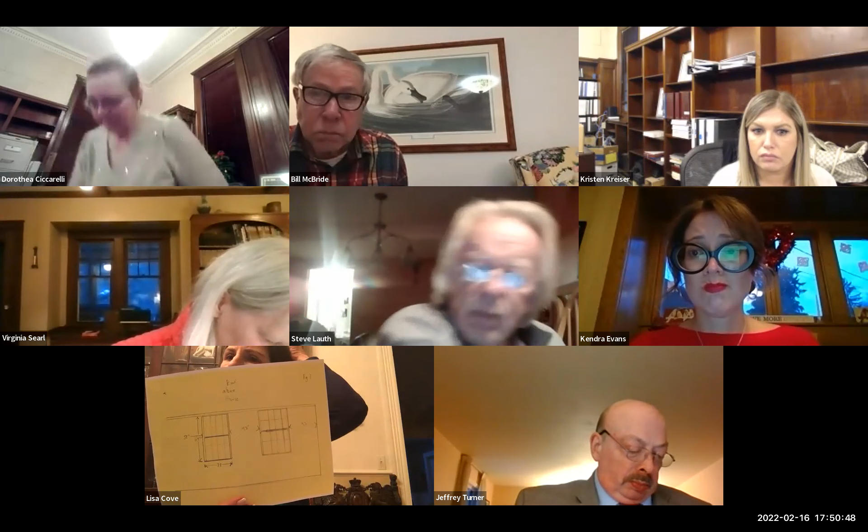Is it this? Are you talking about this right here? That should be, is that marked like page 1, 2A, 2B, page 3? Yeah, page 2B. Yes, page 2, 2A, 2B, and 3. There should be a 1, 2A, 2B, and 3. I see 2A, 2B, okay, hold on. Wait, let's see, here's 1. Okay, so is this 1 with the door? No, no, I don't have it.

I have 2A, 2B. Ginny, do you have these? Yes, I do. We should have an existing drawing and a proposed drawing. Yes, that shows the full elevation, the whole thing complete on one sheet of paper. It was too large, I mean, then you use a smaller scale.

Hey, this is Jake Deagle. So again, we submitted our application in advance. We received no comments from the board. So can I request that we move on to a decision here, and you guys can discuss this offline?

Well, we can't make a decision until we understand the proposed drawing. So we're trying to do that for you. At the last meeting, it was requested that scale elevation drawings be provided. That was the feedback you got from our first meeting on this project. And that's what I contacted the contractor about, and he provided a drawing. If he would have put that drawing on one sheet of paper, you wouldn't be able to see any of it because it's too wide to do in one sheet of paper. That's why he did it in 3 sheets.

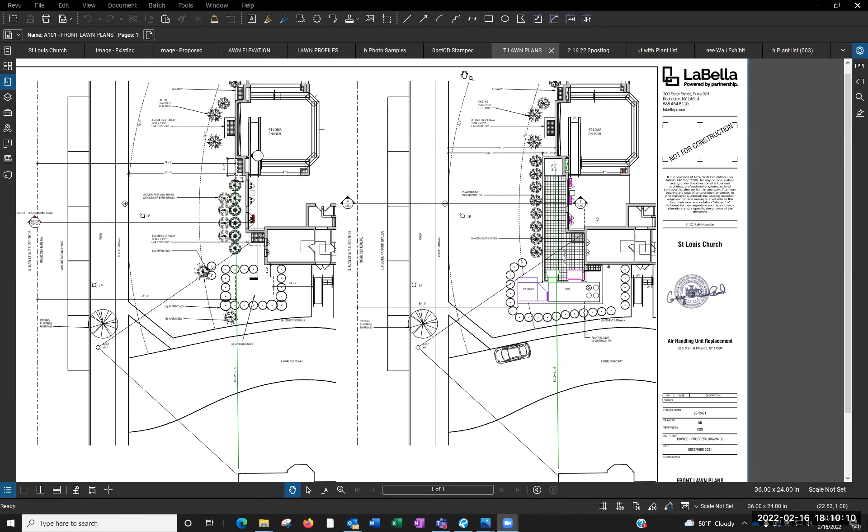And then as far as the wall, you're using the wall to hide the connections, right? Correct. Casey, can you show us a cross section? And those are underground? One will be underground, but one will run above ground. The reason we spent a lot of time on that with planning and zoning is historically we have had significant water table problems in the church basement.

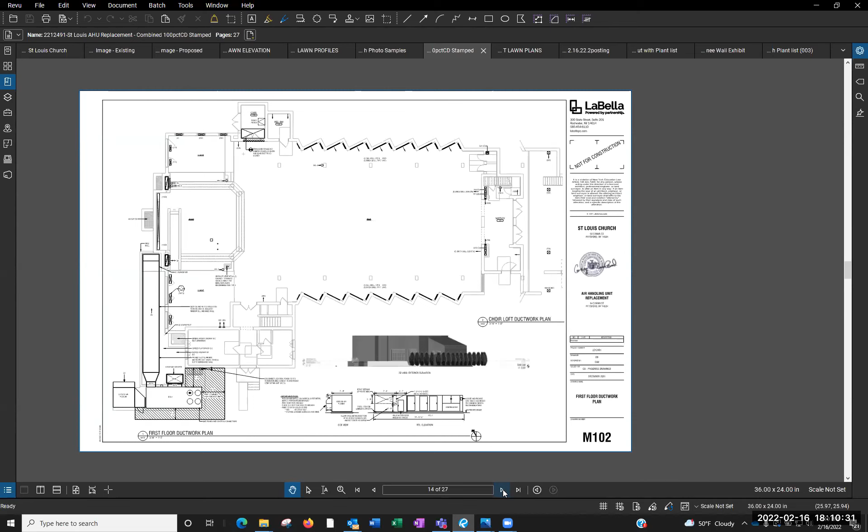We really don't want to go deeper in the ground and displace more water, and also run the risk of having water infiltrate the ducts. So if you look at this floor plan, you can go back to that, Casey.

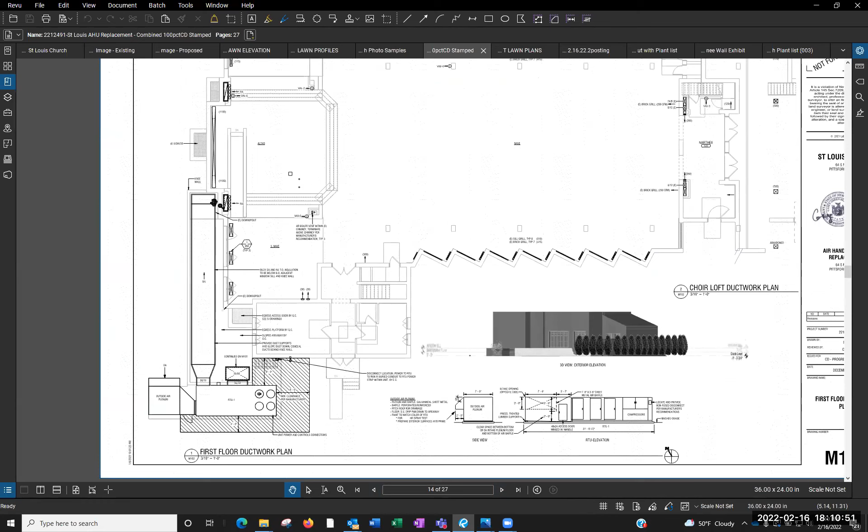So the target area that we have to get to is up at the top left of the screen now, this little box—that's the altar area, and immediately under that is the mechanical room. So that's where all the ductwork comes back to, and that's obviously where we need to connect.

Then at the bottom left of the screen, the box with the 4 little circles, that would be the new unit in the same place as the present condenser. This vertical box is the ductwork running from it. To enter the church, there's an existing opening on the front of the church where currently the outside air is sucked into the heating system.

And that opening in the foundation is large enough for the two trunks, the two pieces of duct, to fit through and then connect to the boilers to provide heat.

Okay, so what you're doing for us today—because I know that information went through planning and zoning, so they got the mechanics of all of this—our charge as a preservation board is to make sure that the unit and any ductwork is hidden appropriately for the architecture of the building.

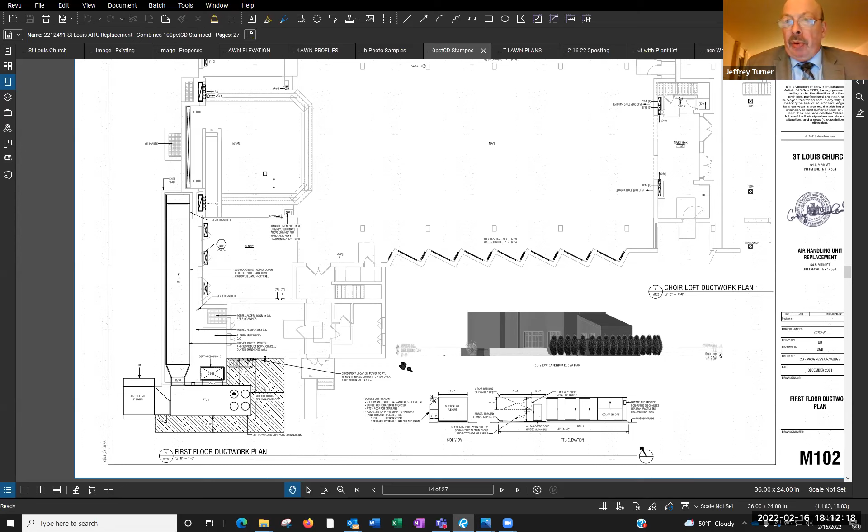Correct. So is the wall, is that correct? So you're reviewing, Lisa, the wall. Lisa, the charge of the HPB is to review the knee wall for appropriateness. Okay, so it's just the knee wall, not any landscaping tonight. Correct, just the knee wall.

Okay, do we have any materials list on the knee wall? Do we have a photo of what the knee wall is going to look like? Okay, I'm going to go first to a painting. Casey, can you bring up the painting? Yep. May I make a comment here?

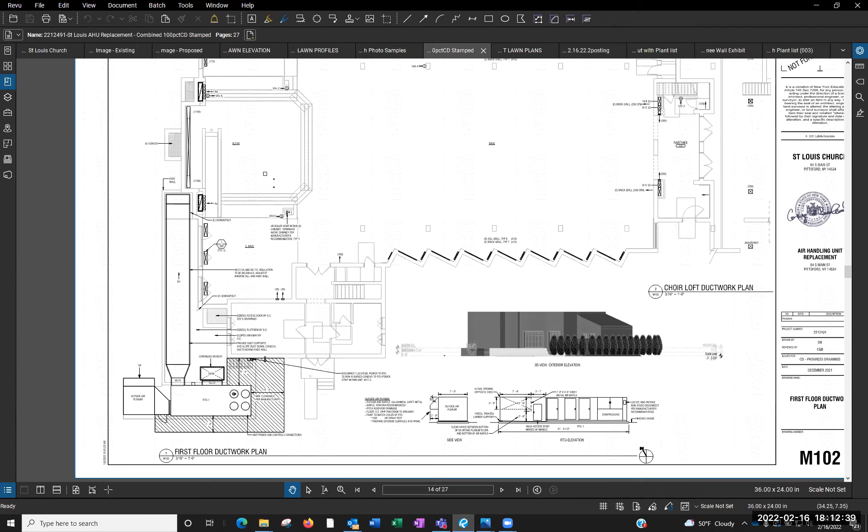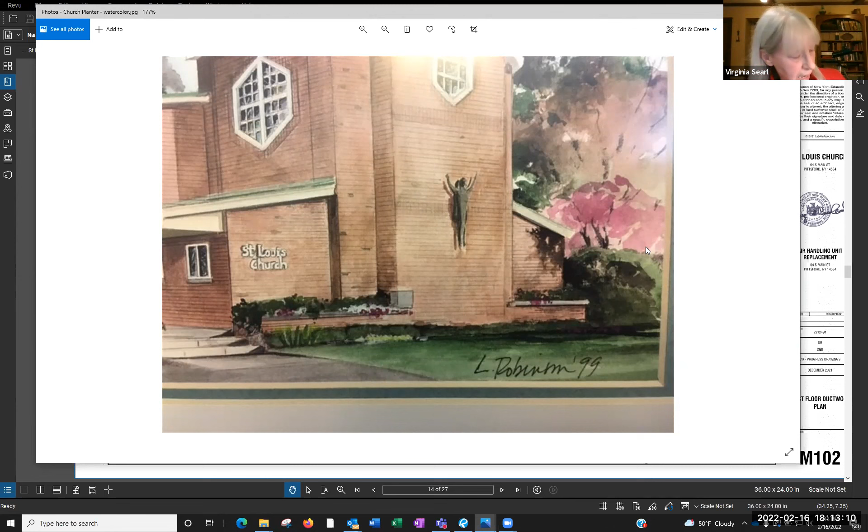These are very nice mechanical drawings. The HPB does not care about the mechanical system, as Jeff has pointed out. Our job is to look at the knee wall, and on the page that was just put up, M102, there's a tiny image that's very dark, and that's the only elevation drawing that was provided to us. In this instance, again, we don't care about all the mechanical drawings.

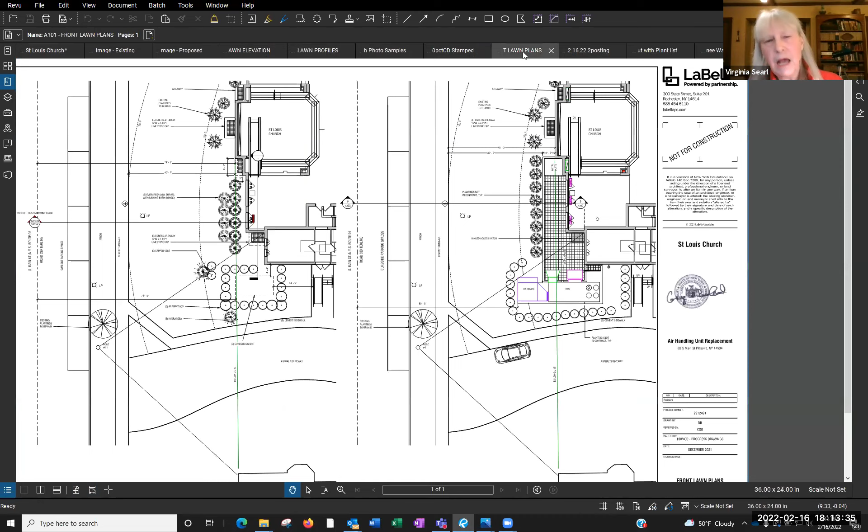That's not our purview. It has no impact on our decision, the mechanical system. We need to see a clear elevation drawing that shows what is proposed. And we don't have that.

I have to agree with Ginny on this. It's the one thing that we had asked for during the information session, to make sure that we could see that knee wall without landscaping. I have a very difficult time voting with what was in the packet ahead of the meeting.

Well, what information thing? I'm sorry, Claire, who's asking a question? Yep, Sally Schrecker. Okay, yeah, Sally. I realized that not all the materials that we prepared got put into your packet, but you did make a reference to some kind of an informational thing. Yeah, so you guys came—something in the—I'm sorry.

We heard this project as information only, and we had talked primarily about the wall. That was our biggest concern, and that we would need elevation drawings, a materials list, and a visual of what that wall is going to look like.

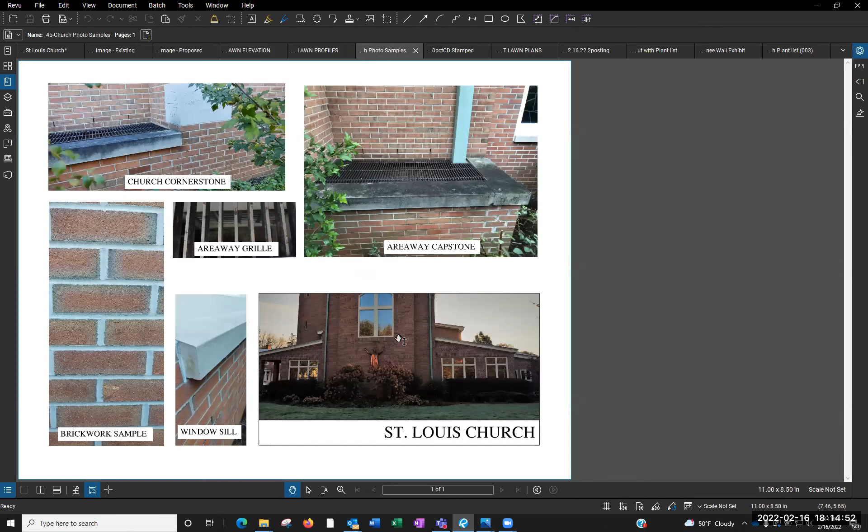That's our concern. Okay, well, I don't recall there being an informational meeting. Yeah, I don't either. If there was an informational meeting, I must not have been in attendance. No, this is the first time we've been before HPB. Well, Kendra, do you remember talking about this? I do, yeah, I knew this was coming. Why am I surprised? And Ginny was there. Yeah, we were all there.

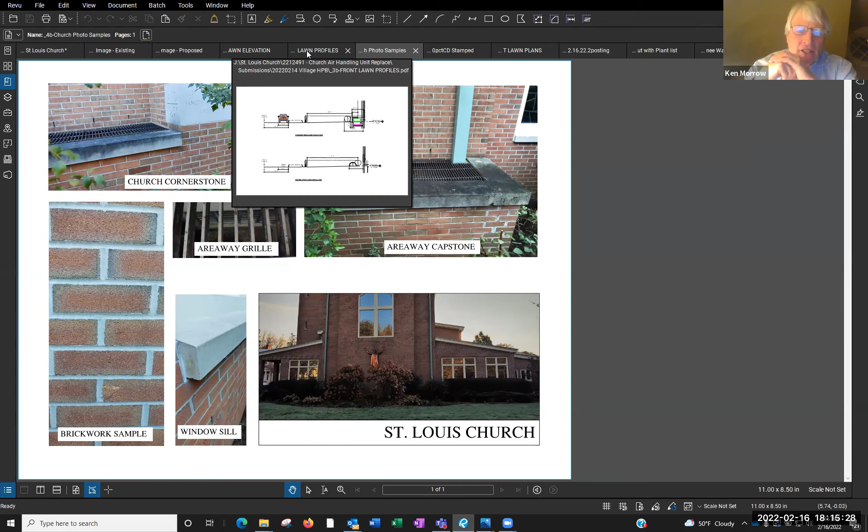Excuse me, is it possible that Steve just gave us a heads up on what was going on? I remember we got a heads up that we should be aware that there was going to be a discussion about it.

Okay, well, it doesn't really matter. What matters is that we need an elevation drawing of this wall. We need a materials list. We need to get a visual of where this is going to be put and placed on the property. So we can't go any further tonight to vote on anything because we don't have anything to vote on.

So if we could table this—Sally, if you can go back to the landscape architect or whoever's going to do this wall for you, and have them do an elevation drawing and a materials list, and give us an idea of exactly what this is going to look like and where it's going to be placed on the property, that's what we would vote on. Does that sound okay for you?

Oh yes, I can understand that. Okay, so as I understand this, there was a wall out there historically. Yes, I'd like to show you that picture. Do you have pictures of that?

I would urge that we table it until we have the new dimensions. I think, okay, but when that comes back, you come back in the packet—bring us the drawing of what was originally there, so we can get a visual of what that was, and then what you're proposing it to be.

I'm sure someone in the architectural department at LaBella is familiar with the kind of drawings that a preservation board wants to see. They do a lot of preservation work.

Okay, so is that okay to table this? We'll have you guys get that information to us, and hopefully we'll get you on the agenda for next month. Can I just interject? So are you seeing the screen right now? Yes.

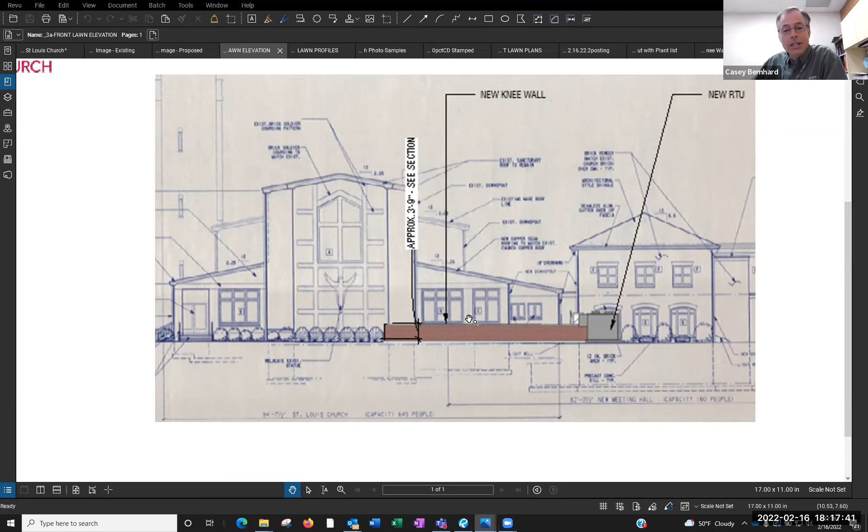I realize this is a drawing from the 2000 renovation project where they did an elevation view. We've superimposed the knee wall and the unit without any landscaping. We have a lot of stuff, I don't think everything got into the application that you have. So is this what you're asking for? We also have renderings - this existing view, and then a proposed view with plantings. I have another one, a rendering with no plantings, if you give me a second I can pull it up.

If you go back to that image that's a blueprint with the wall superimposed, what is that big gray box on the right-hand side with a leader going to it?

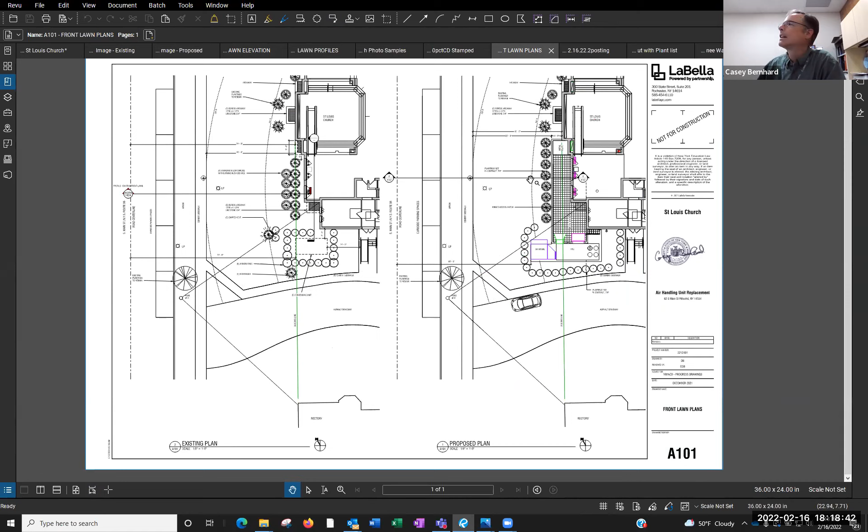This is a drawing that I find is maybe the simplest thing to show you existing and new. The left side says existing plan view - this is what's existing now. This is what is proposed. Just to zoom in a little bit here, this is the existing condensing unit - that's the same thing that most houses with cooling have outside that gives you cooling.

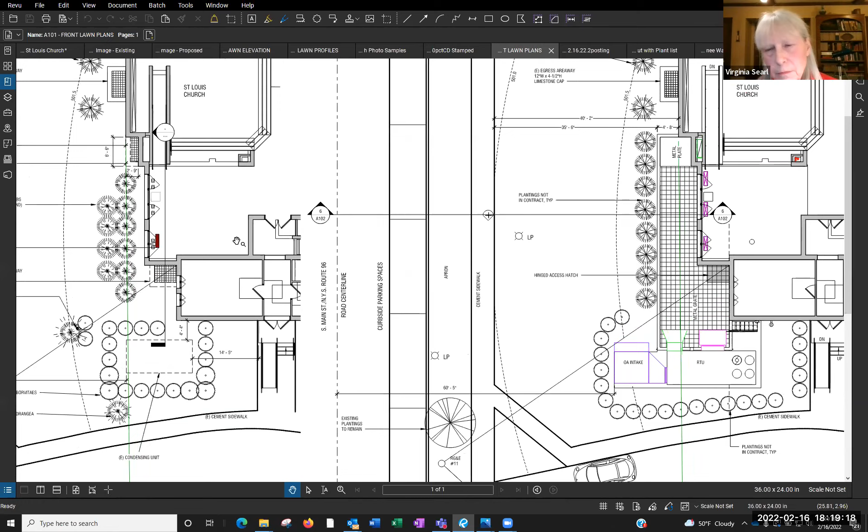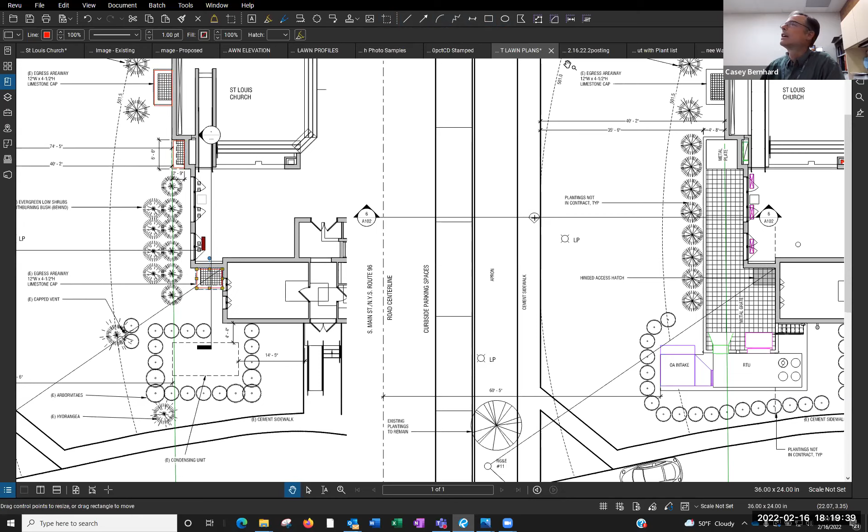The knee wall is not shown on that drawing, is it? On the existing drawing, there is no knee wall - there are areaways. This right here is an areaway that is very similar to what the knee wall will be. That's an areaway, and then this is an areaway. That is all. Sally, I can show you this stuff.

This picture here shows those existing areaways. Okay, so what - there is no knee wall there now? They're just the areaways. Correct. That's what's left from the original.

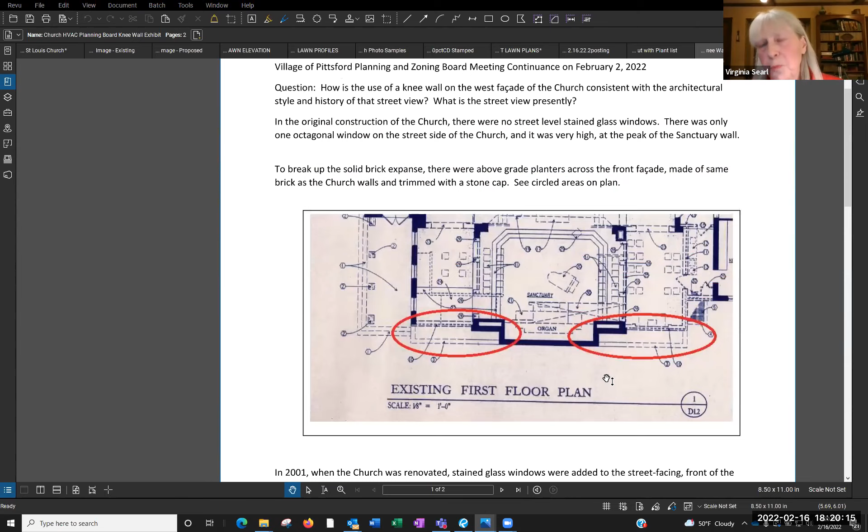Casey, if you could scroll up to the top. Can I go back to the question that I asked with the blueprint that you had? What's the big gray box on the right that's showing in front of the house next door? What is that? That's not the house next door - that is the parish meeting hall, which is connected to the church, and it is the new rooftop unit. Up at the very top right it says new RTU.

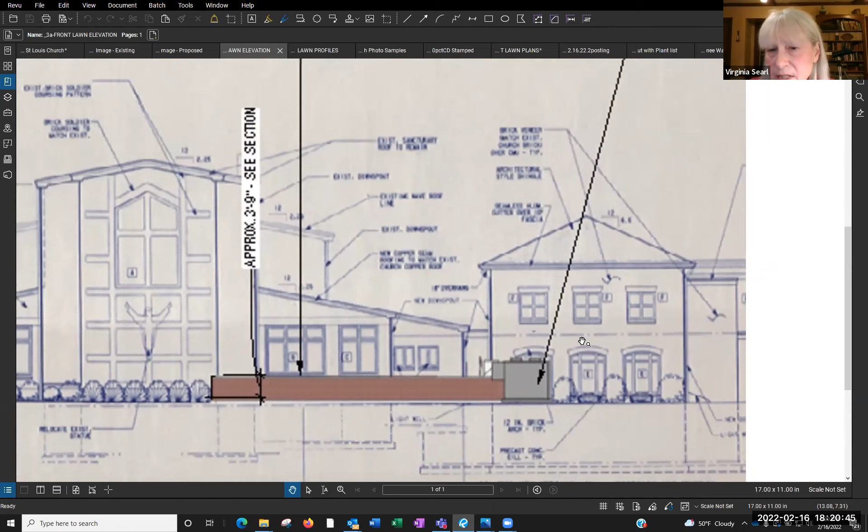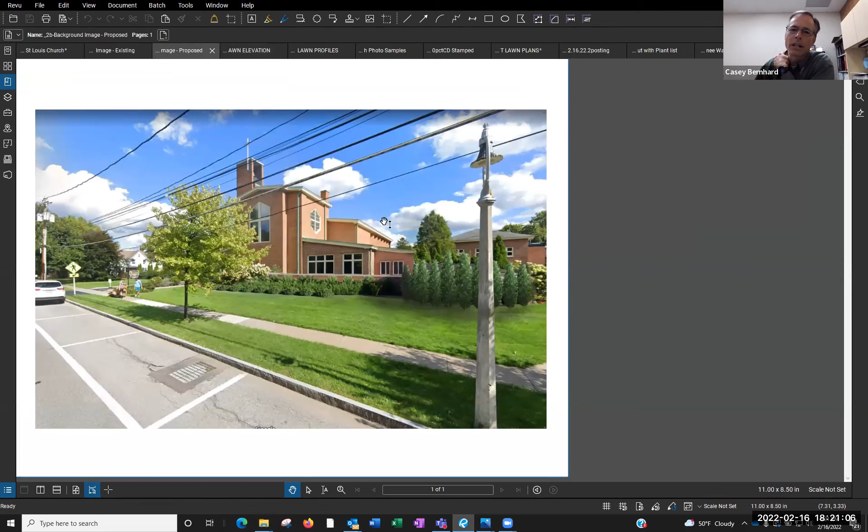I'm sorry, I can't see that. Okay, but that's not on the rooftop - that's on the ground, and it's completely obscuring one of the 3 windows on the first floor of that building. But the existing unit does the same thing. Yeah, this is a rendering of proposed. So here's the existing view, and this is the proposed rendering.

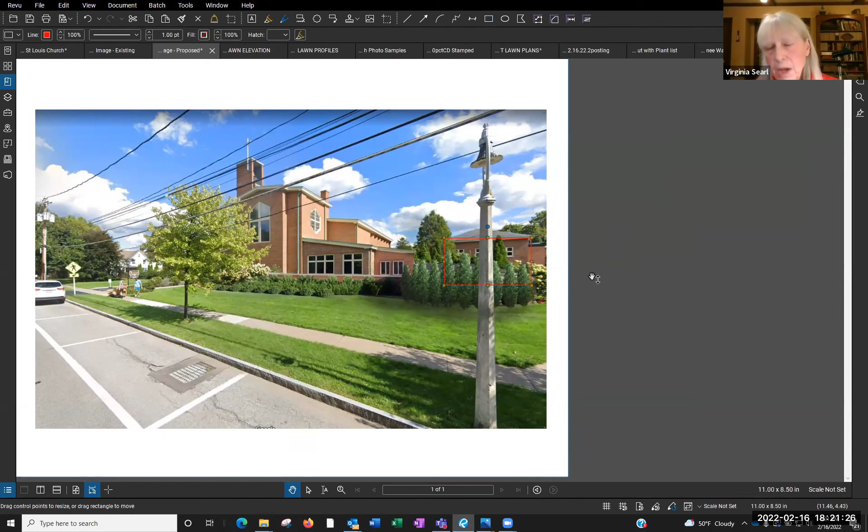Okay, and point out to me where the parish meeting hall is on this rendering. Okay, is that right Sally? In the background, yes, the one with the shingled gabled roof. Okay, and also this picture is a side picture - I need to see it from the front, because right now we're looking at it from the side.

So if you were to stand, it's from Main Street - that's the front of the building. No, I know the front, at an angle - it's not a full front elevation. Yeah, right, you're at an angle here. If you were to - this is a photograph. Right, this is a photograph.

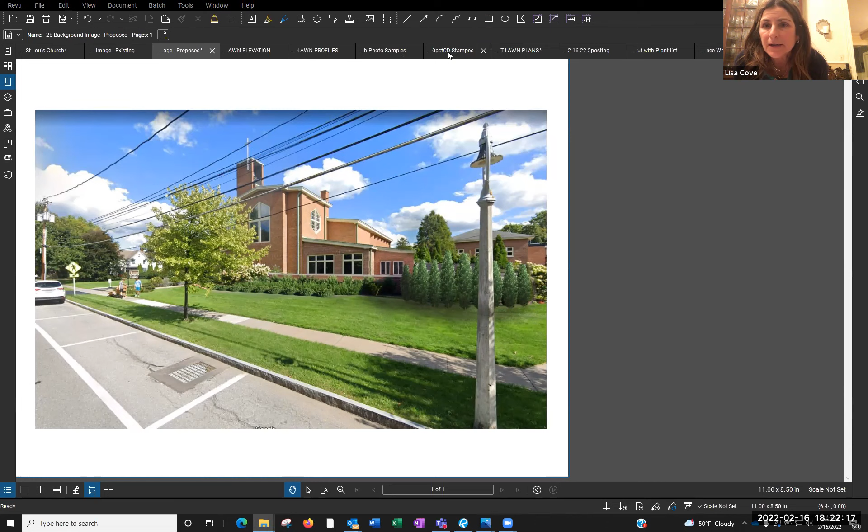So what we need is we don't have the dimension of the wall, we don't have the materials of the wall, we don't have the drawing of the wall. I think we've got a lot of fluff in here of mechanics, and we don't need that. We need specific visuals - we don't want to look at it from the sky, we want to look at it from the ground to the building. So what we're saying is we don't have enough information. We can talk with Steve and find out exactly what we need, but this one thing is not going to do it.

We need to make a motion to table at this point. So we're going to move forward - it's not complete for tonight. So do I have to make a motion to do this, Jeff?

Jeff Turner, are you there? I'm here, yes. If you're going to table it, can you give the applicant specific instructions about what this board is going to need to see to review their application?

It sounds like at the very least you need measured drawings of what is there right now without the shrubbery, measured drawings of their plan, a materials list, a photo of the current state head on, and another photo drawing in the wall exactly where it's going to be.

Well, that's good, but we also need the architectural drawings because that's the requirement of the application - drawings of what is there, architectural drawings of what they want to put there, and a photo of what it looks like from the street head on, with the knee wall drawn in to scale.

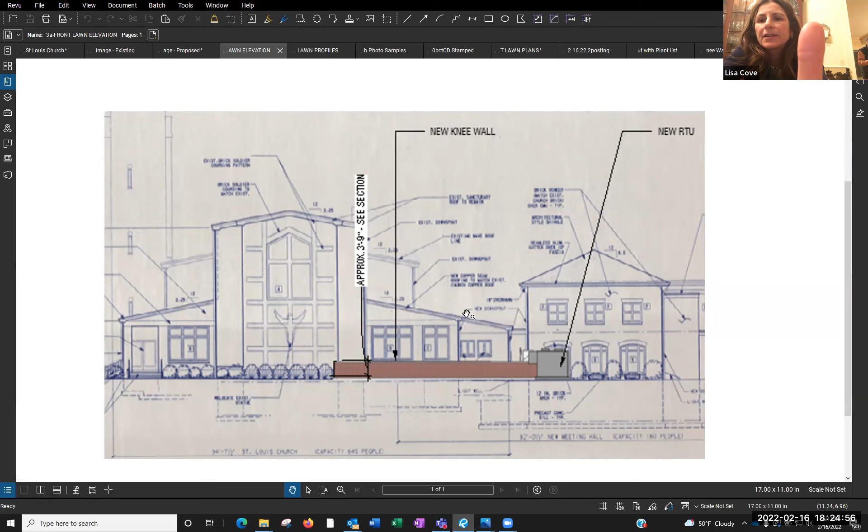Okay, Sally, okay with that? Yes. Okay, thank you guys very much, and we'll look forward to hearing you. Well, thank you for taking the first look.

Okay, Sally, we're going to move on to signage at 18 to 20 South Main Street. Do we have our applicant here? Jessica, give me a moment. If the applicant for 1820 South Main Street is here, please raise your hand. I don't see you. I'm not seeing him at this time. I suggest the board moves on and we'll come back to him if they show up.

We are going to 52 Heatherhurst Drive for replacement windows. Okay, the applicant for Renewal by Andersen - I guess Sue is going to be the person speaking on behalf of the homeowner. Is that correct? I'm still checking. There's Kenneth Connor. Okay.

And Mr. Connor, you should be able to speak. Is that Ken? Hello. Hi, Ken. Hi. Good to see you again. You too, without a mask even. I know, nice, in the privacy of your own home.

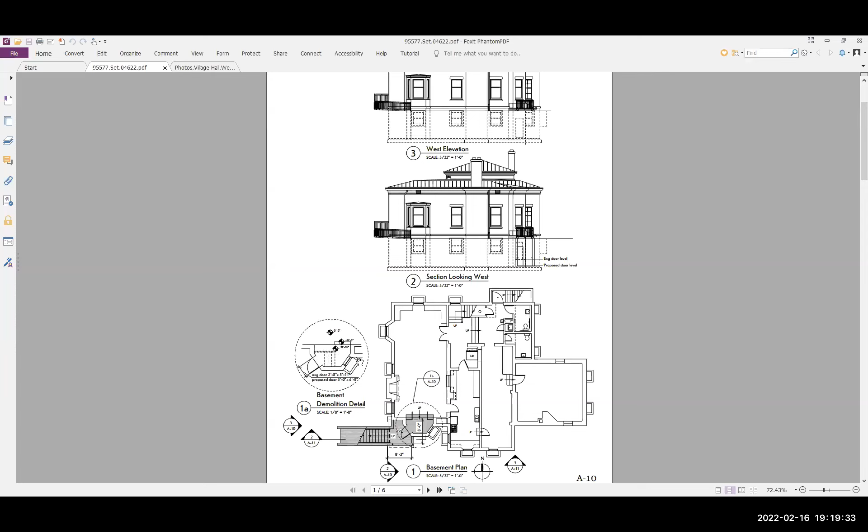So the scope of work includes replacing the existing concrete steps to the basement with a wider, more gently sloped stairs. Here's a plan showing it.

This is the basement plan. You would come off the parking lot and have a shared concrete walk, either to go to the front door or to the new basement entry. Then it takes you down to a larger landing at the bottom of the stairs.

And then we have a roof canopy that's designed as a hip roof to cover the landing to reduce the buildup of snow and ice. It's proposed to have a standing seam zinc or tin zinc alloy coated copper roof compatible with the Village Hall, which has hipped roofs with the archaic field formed standing seam, as Virginia talked about in an earlier application.

A significant part of this work is to lower the landing level and increase the size of the existing masonry opening at the door, so that a code compliant door and a landing on each side can be provided.

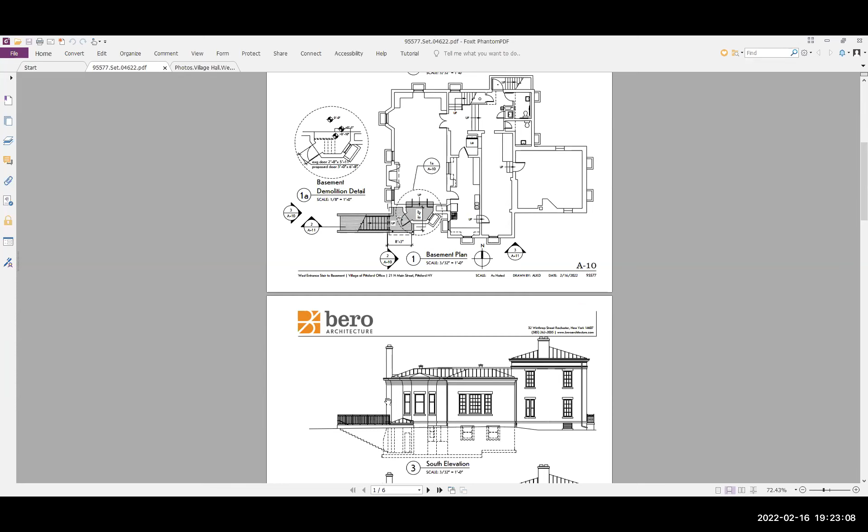Lastly, the metal guards will match the design of the north entrance walk-in ramp, and we're studying including heated sidewalks that will further enhance the safety for occupants getting in and out of the Legion Room. That concludes what I prepared for you.

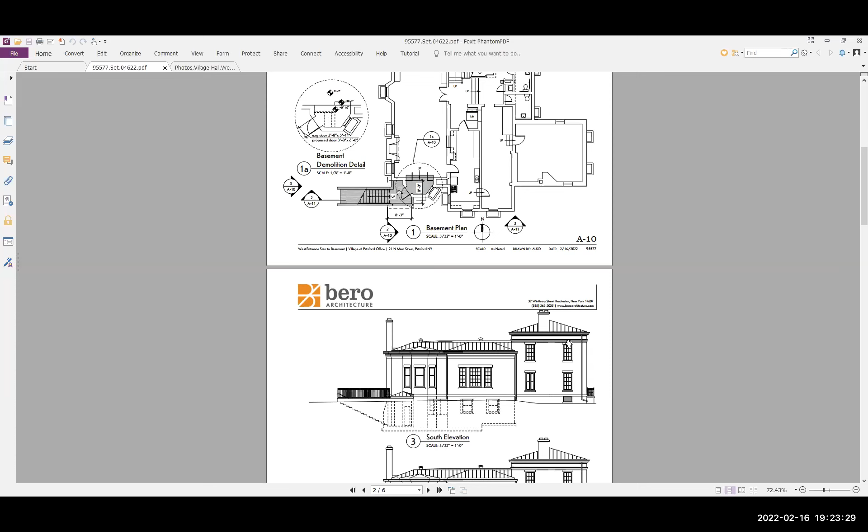I have a question, this is Lisa Cove. There is a talk of some kind of canopy. Yes, there's the canopy, can you see that? No. It's in red here.

So it's a small canopy roof that would protect the door below, because you would go down the stairs and the canopy covers that bottom landing. The canopy is shown red in our drawing because we couldn't change it to gray, but really it would match the lead coated copper roof you have on your Village Hall. And it wouldn't cover any of that window at all. Correct.

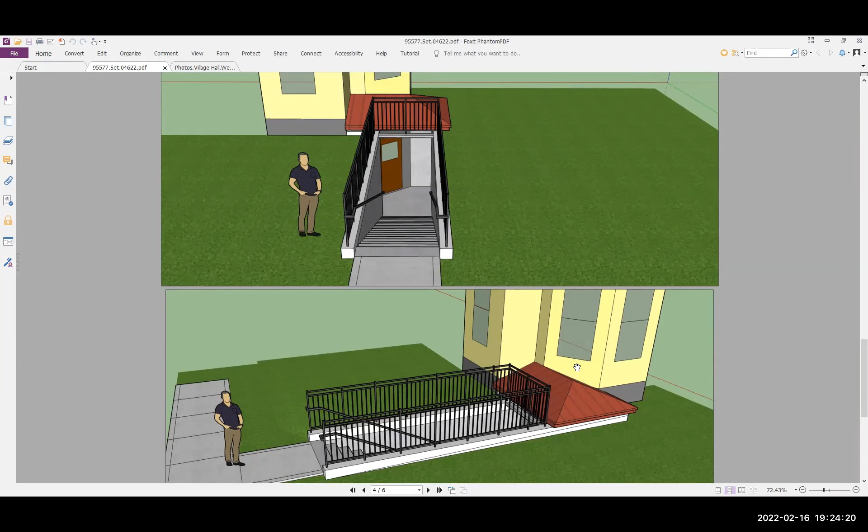These are just some SketchUp renderings, preliminary of what we're proposing.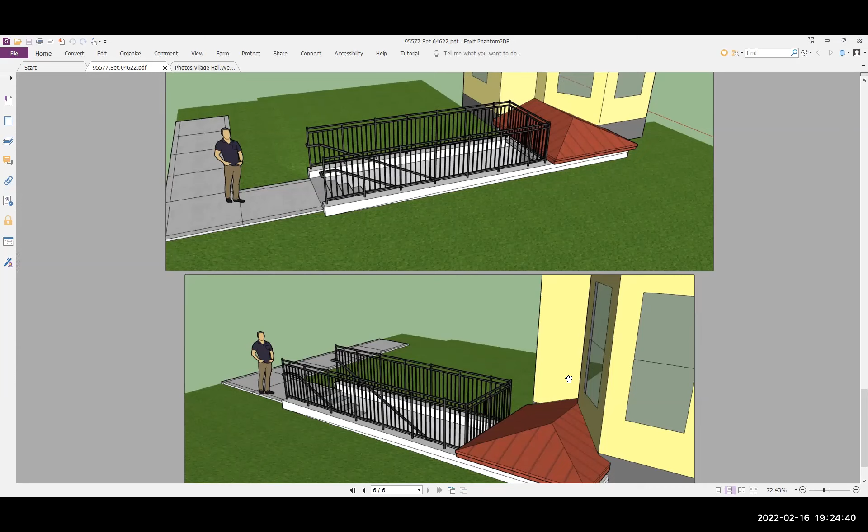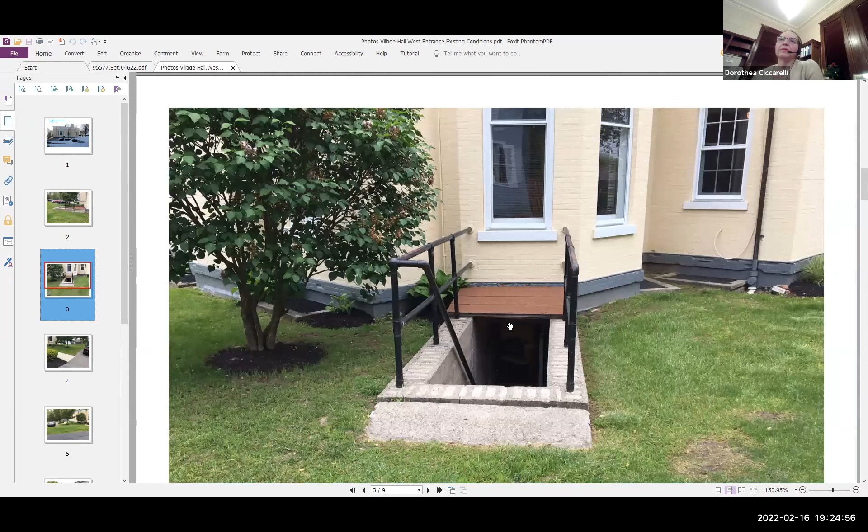Does the canopy have to sit up there? Can't you have it cover over the door down below instead of sticking up out of the ground? Well, the door head is... because what's there now to cover the door? Here's an example right here, switching over to the photos. Yeah, cardboard - it's like a piece of wood with some shingles on it. I don't think it's anything. So the purpose is to keep the weather off of the entrance of the door, correct? Correct, it keeps ice and snow from building up at the bottom of the ramp to keep it as safe as possible. So I'm just wondering - is there another option than having that kind of protruding out of the ground?

Okay, so here's an elevation right here. You can see that we have retaining walls surrounding the steps that go down, and then we have the roof on top of those retaining walls. I guess to limit the amount of earthwork, because we'd have to provide retaining walls if we wanted to recess a roof area, and more retaining walls to protect the roof covering. So it's possible, and we will look into it.

Yes, Virginia, you got your hand raised. You're muted. You're muted.

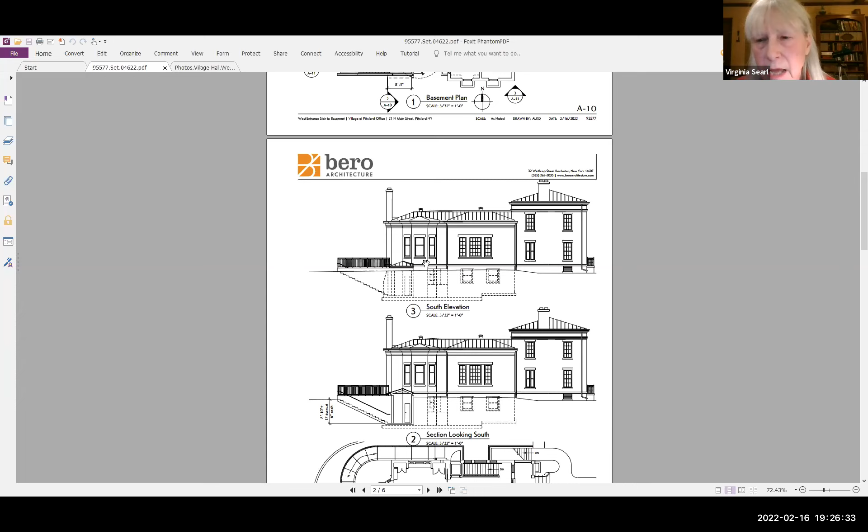I'm pretty sure the roof on the Village Hall now is bright copper. It's patinaed now, but I think it's bright copper, not lead coated. That was my job. Well, then you know. I know George Easton did the work, but yeah.

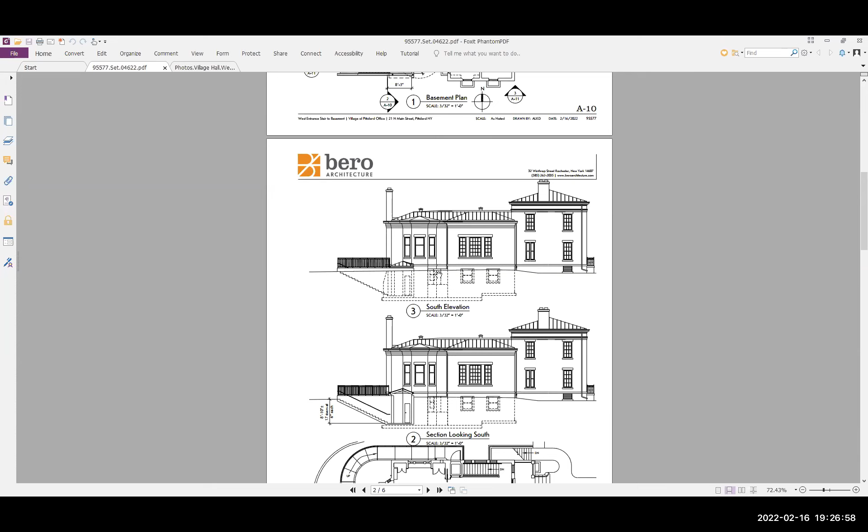The elevation. Oh, you're muted again. You're muted again, Virginia, I'm sorry. Never mind, she said never mind. I did read that, yes.

If I could circle back to that covering, it looks on the elevation drawing as if it sits lower than the railing, even if it's not accurate. So it's not -- yep, it does. This is a model of it. Do you see the model with the red roof?

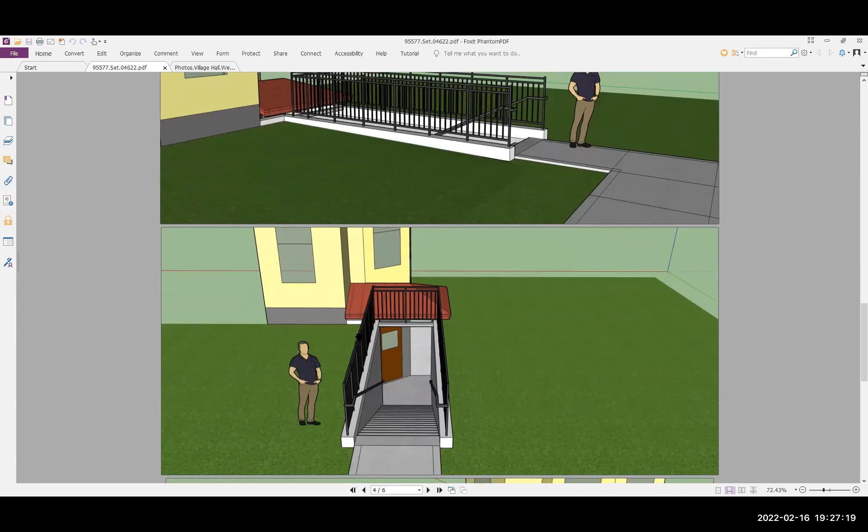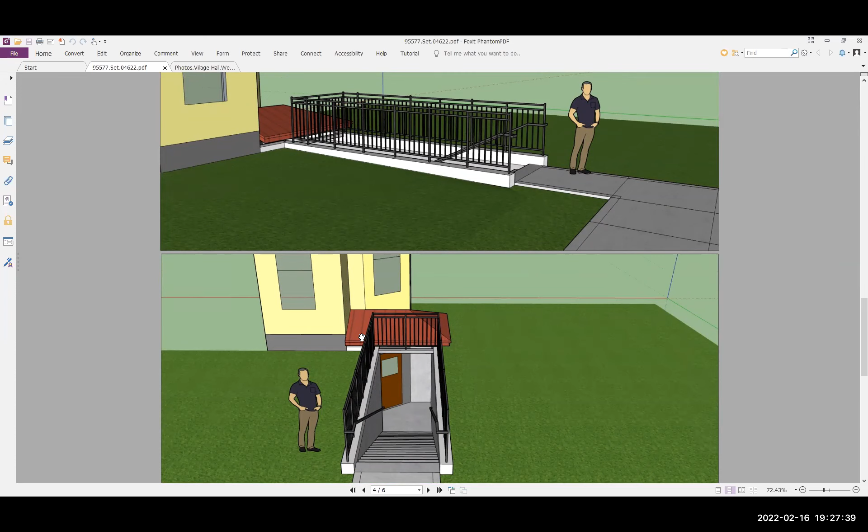As we were talking about it, it's obviously a great improvement over what's currently there, especially if it matches the roofing above. But just as some of the concerns, I think rather than adding a retaining wall -- this is still lower in elevation than the windows and the railing, and it makes sense to me. And it's below the window. That was a good question, whoever noted that.

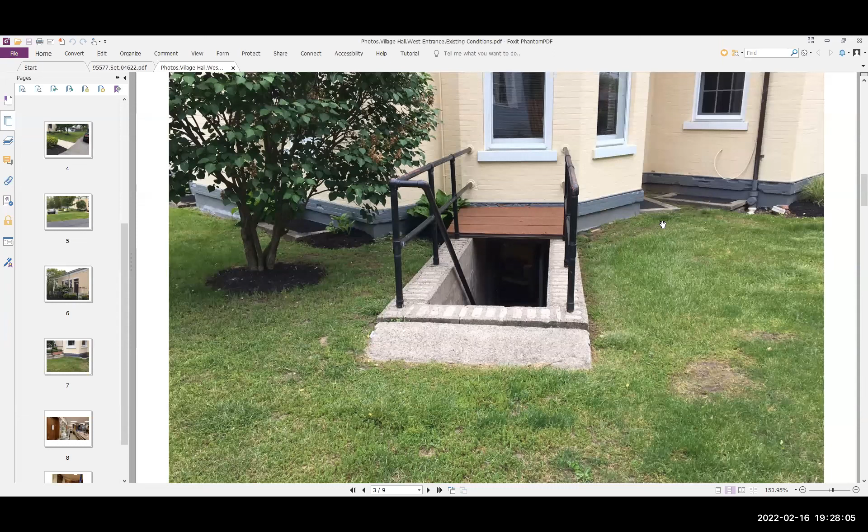I have a question. What are the windows shown in the drawings of the existing building that are below the Earth's surface? There must be areaways or window wells. Here you can see in the photo. Yes, those are from the basement. Some are in our furnace room. Some are in the hallway. Window wells, yeah. Oh, here they're shown in plan. They're window wells. Okay.

So again, as Dorothea said, we're engaged again by the village, and so we're basically looking for a concept. You're headed in the okay direction. We will be coming back with more detailed plans and a materials list, but we wanted to make sure we were on the right path and that you approved and thought it was appropriate and compatible. We will also be reviewing this with the SHPO through the contract document phase.

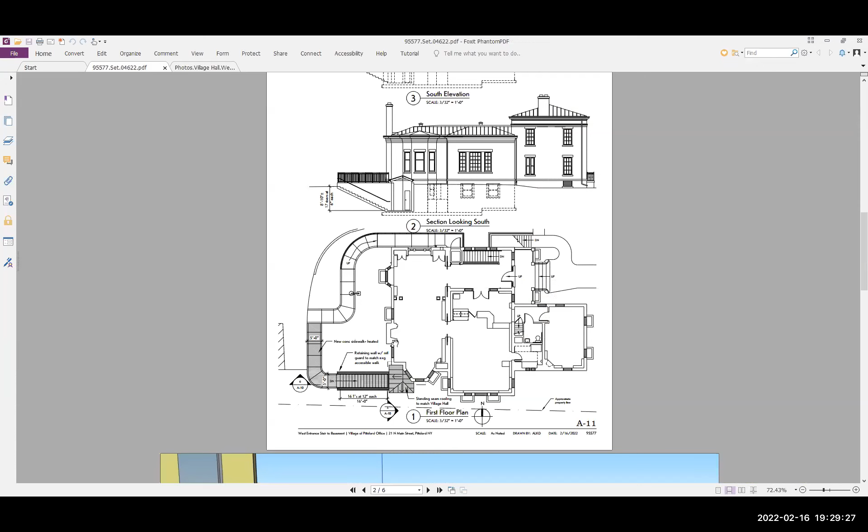The roof that you've got on it right now has a slight pitch to it, right? Correct. And that pitch is less than the pitch of the roof over the whole building, right? Do you mean our proposed design, sir? Yes. That will be something that we evaluate as we move into the construction documents, but yes, it's trying to get as close as possible to match -- I'm gonna have to pull out Virginia's drawings from when she worked on the roofing replacement -- but yes, that is the intention of the design, that we will match the upper roof.

And I have a question that's not really under our purview, but you said heated sidewalks, and I'm just wondering if there's drainage at the bottom since it's totally exposed and we're worried about slippage on those stairs. Great question. Yes, there'll be a floor drain connected into the underground stormwater system. Thank you, yeah, that's a great question.

Now, I will point out that the sidewalk going into the side entrance to the Village Hall is heated already, and we have no issues with it. It's fabulous, provides definitely a safe entrance in. And this being a secondary entrance, it makes sense, especially since we anticipate the Legion using it the most. Yeah, thank you, I don't have any further questions.

Yeah, I think it's great. But I will remind the board, we are ADA compliant because we do have the chair lift when people come through the side entrance to get everybody downstairs. This is just providing a second entrance, as Jennifer indicated. A much safer second entrance. Okay, thank you.

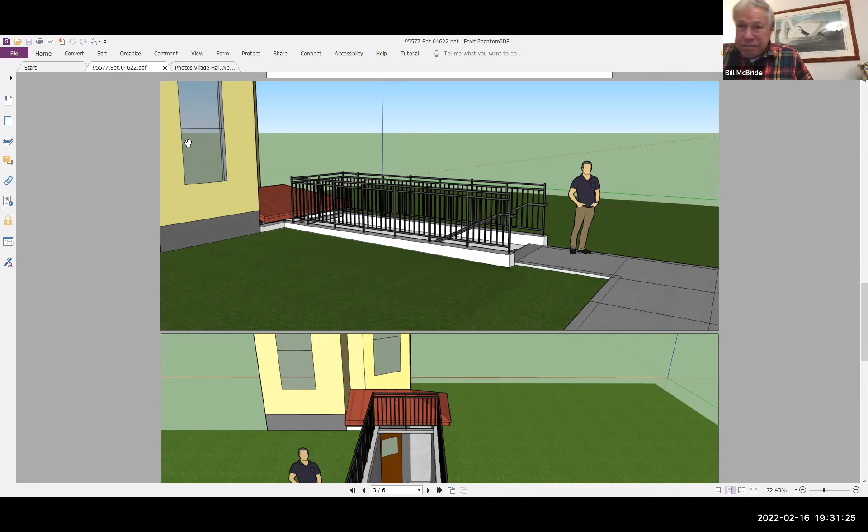Did we lose Lisa? Oh, I'm here. There you are, I couldn't see you on my screen. Where'd she go? Okay, so then does the board have any other questions from Barrow? I don't. Well, thank you for that presentation, we look forward to hearing more. Thank you. Thank you, Lisa. Okay. Bye, everyone. Bye. All right, thank you, Jennifer.